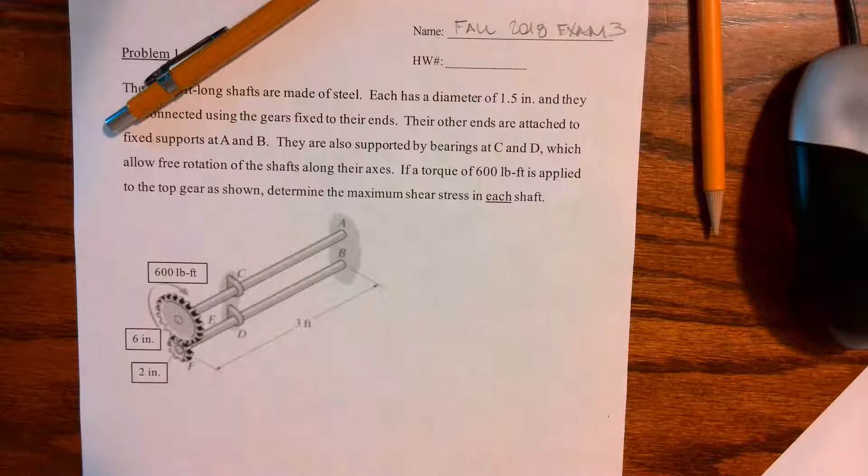Okay, this is problem number 1 on the fall 2018 exam number 3. We have two 3-foot long shafts made of steel, each with a diameter of 1.5 inches, connected using gears fixed at their ends. Their other ends are attached to fixed supports at A and B, so they have a rigid attachment and are not free to spin. They are also supported by bearings at C and D, which allow free rotation of the shafts along their axes. If a torque of 600 pound-feet is applied to the top gear, determine the maximum shear stress in each shaft.

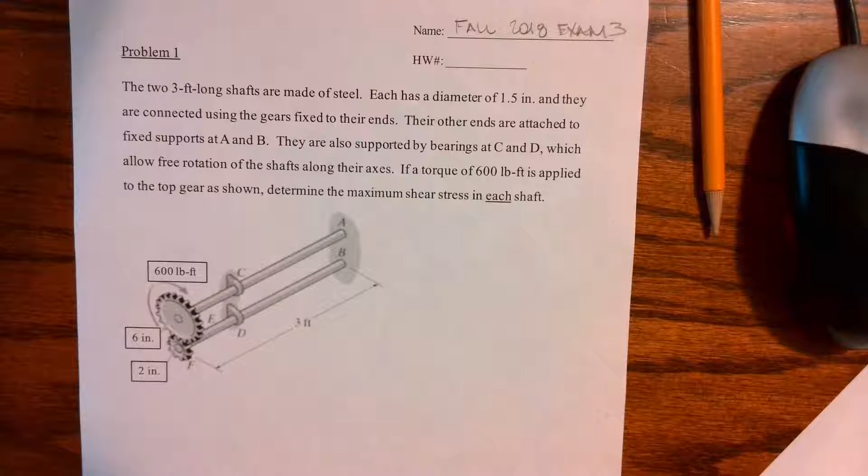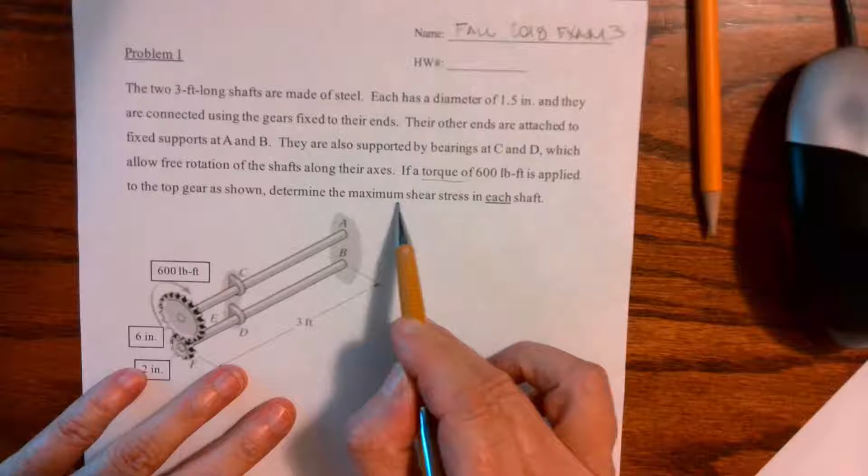So we have some keywords here that tell us whether we're looking at normal stress P over A or shear stress T rho over J. It's telling us we have a torque, and it's telling us we need to find shear stress. We have gears, and gears, we haven't seen anything with gears that's not torsion. So let's go ahead and get this set up.

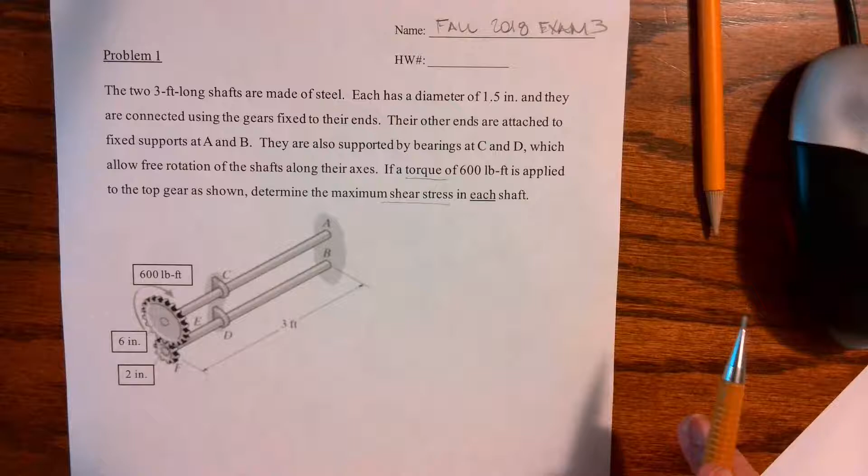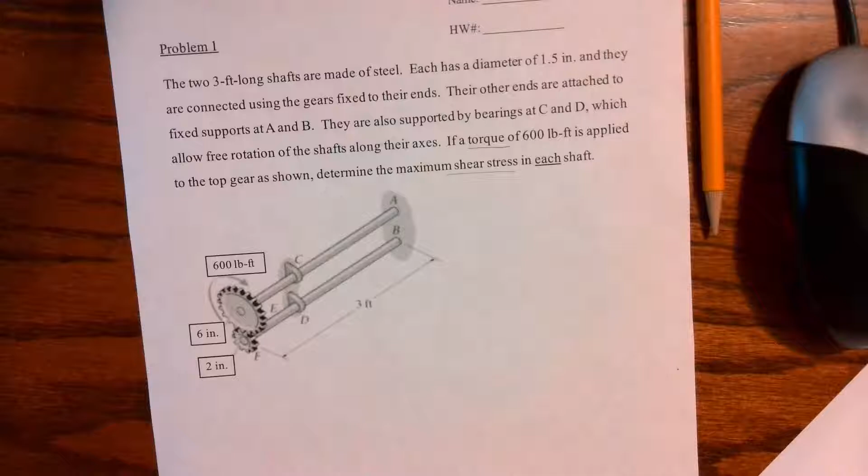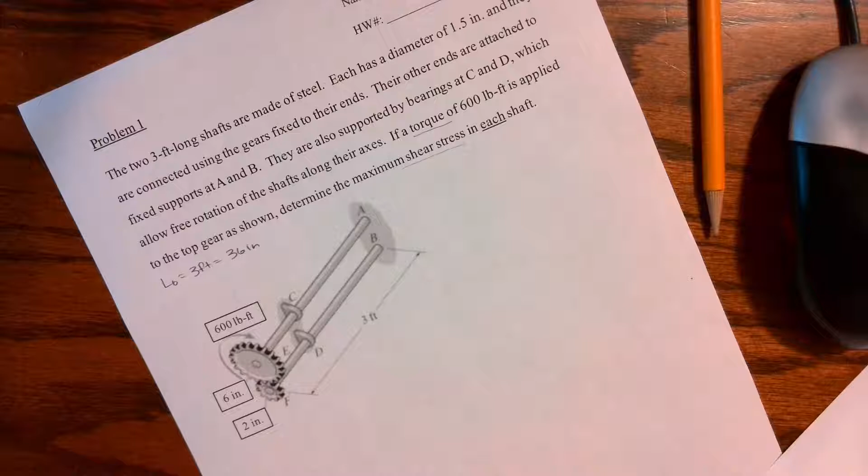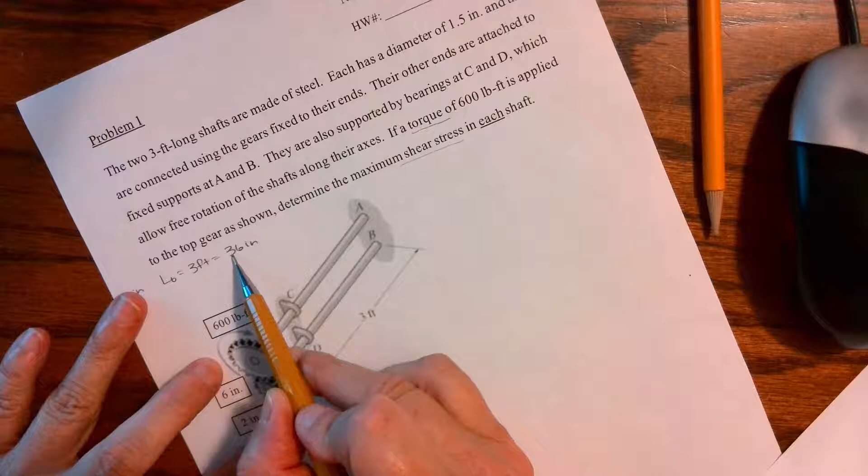It's really nice that both of these shafts are the exact same thing in terms of material and geometry, it just simplifies everything. They both have a length of 3 feet, which let's put in kips or inches or pounds and inches, so that we have consistent units. So from the get-go, I'm going to put everything in kips and inches. So I have the length is 36 inches. They each have a diameter of 1.5.

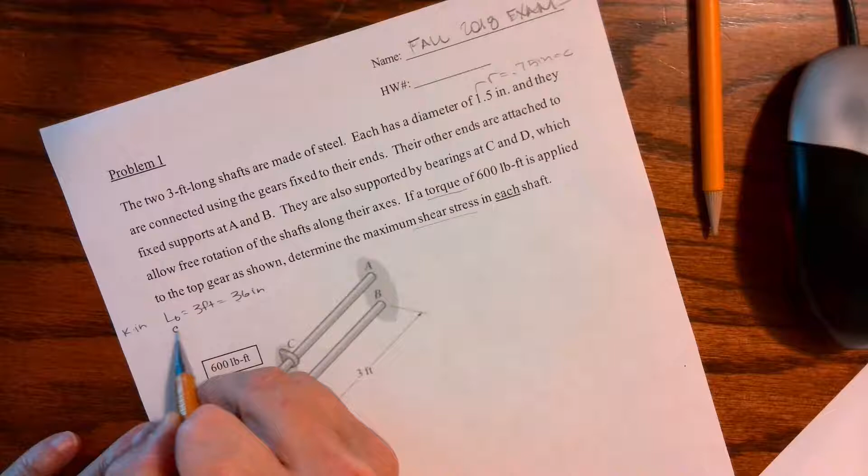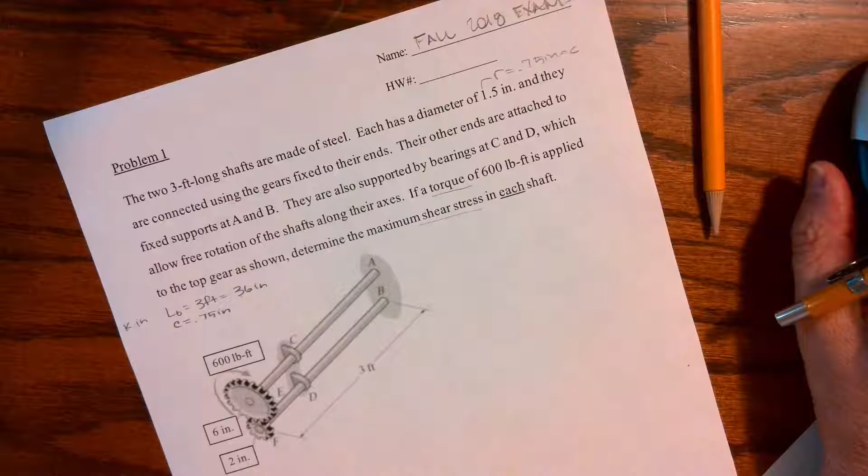That means my radius is 0.75 inches, and I know that the maximum is at C, so C is 0.75 inches, and that's for both of them. They're fixed at gears and made of steel. If I'm looking back on my first sheet for material properties, I don't really need any at this point because we're trying to find shear stress. So we'll worry about G in just a minute in case we need it.

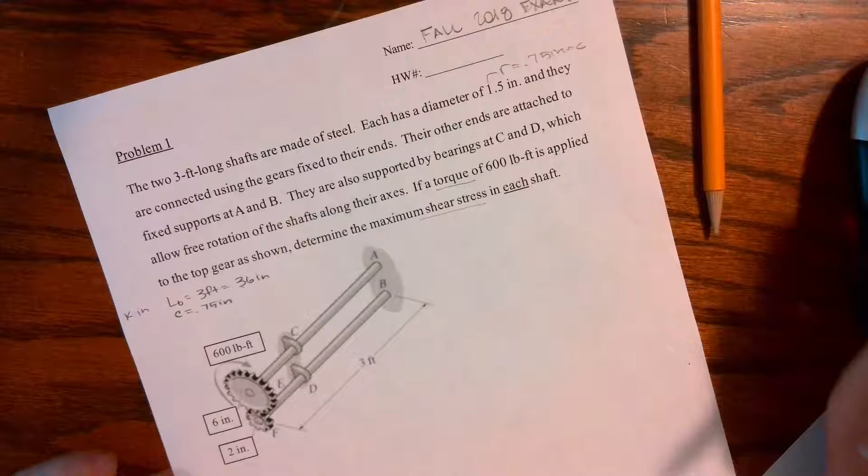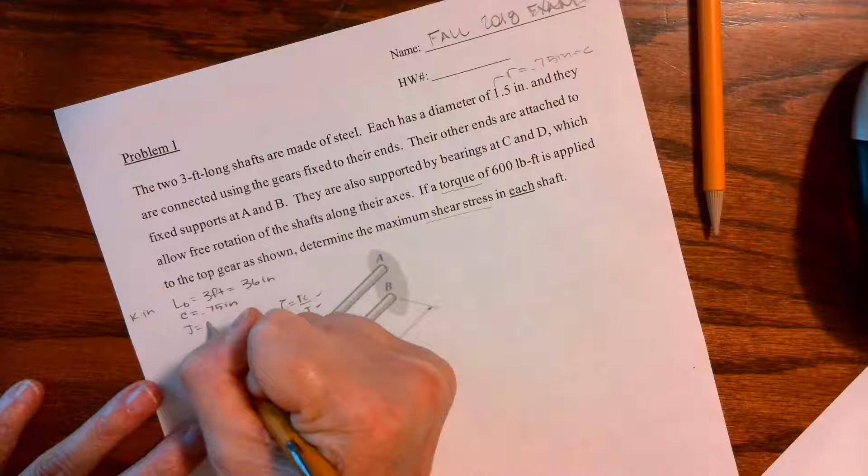Okay, so I have what I'm starting with. I know that I want to find shear stress is TC over J, and J is going to be pi over 2 times 0.75 inches to the fourth, and that's in correct units. So I have everything but that magical torque.

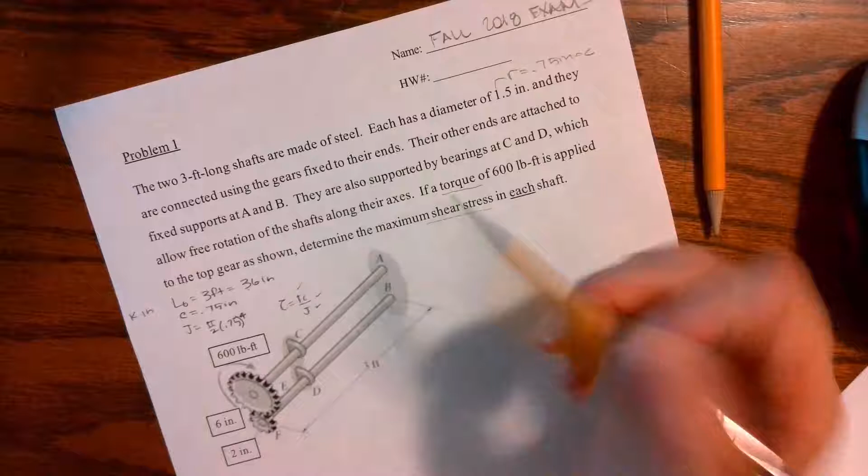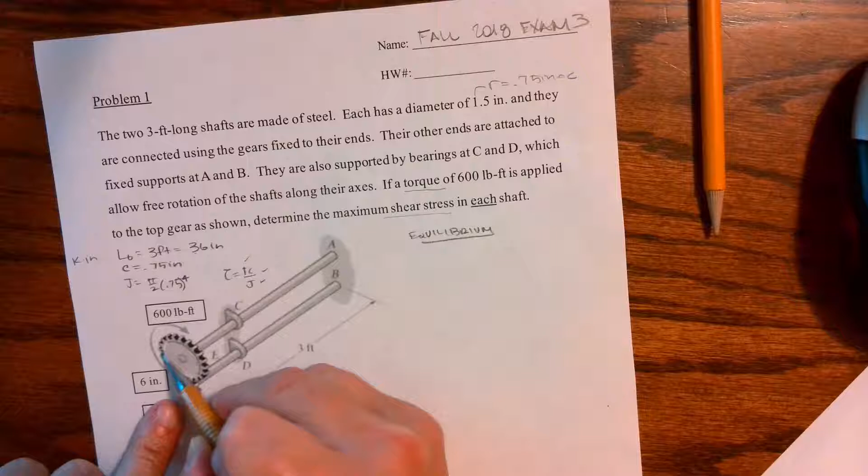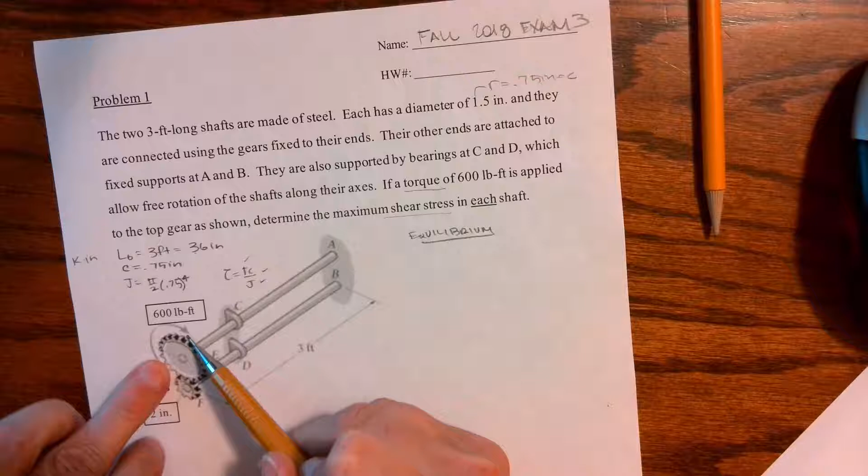So now we have to start with, like we do everything, equilibrium. And if we start with equilibrium, we are going to have to take this apart, because there's actually a resisting force acting in between these. If this is fixed at the wall over here and fixed at the wall, I have a torque, and then I have stuff going on at the wall. So it's indeterminate, but I need to go ahead with the gears and find a relationship between the top shaft and the bottom shaft.

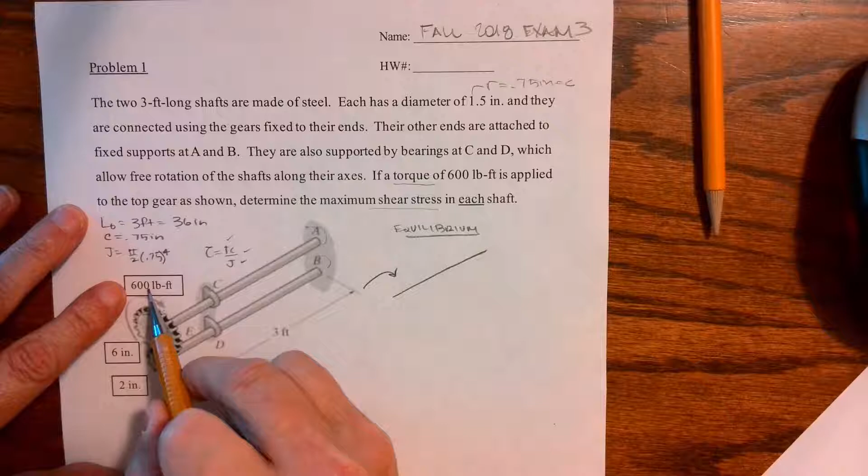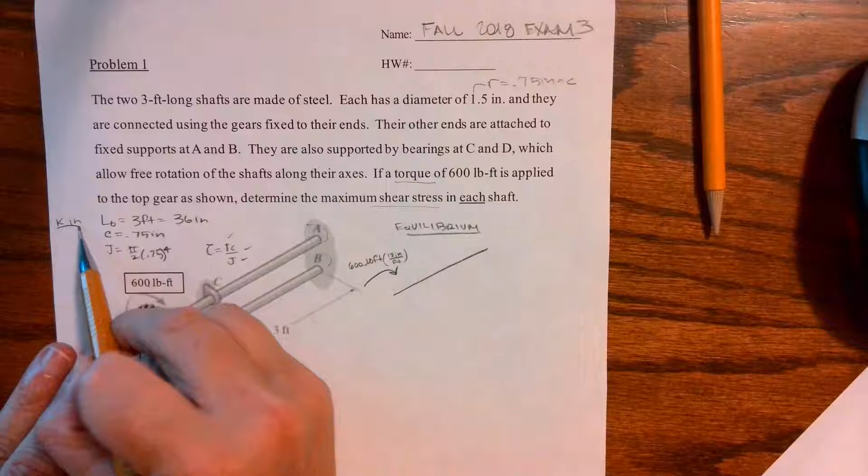So if I take the top one apart, I have this applied torque way out here of 600 pound-feet. So I have 600 pound-feet, and we're going to change that to inches per foot, because we've already decided we want it in kip inches, and we're going to divide by 1,000. So we're just putting those up there for notes for right now.

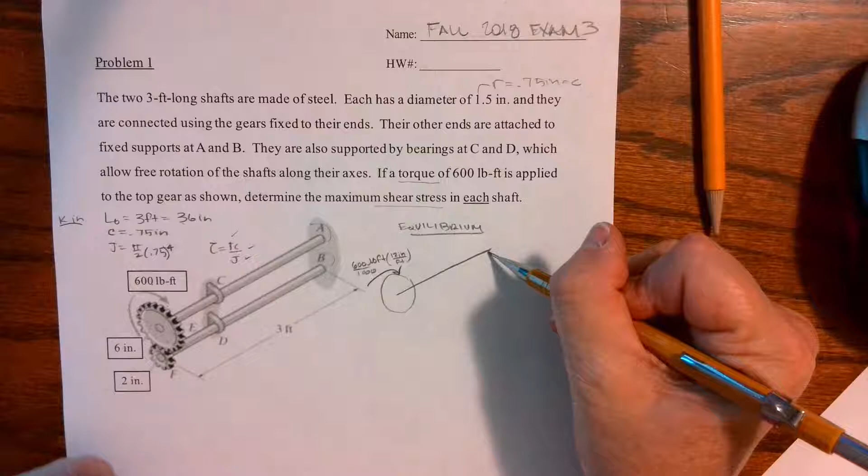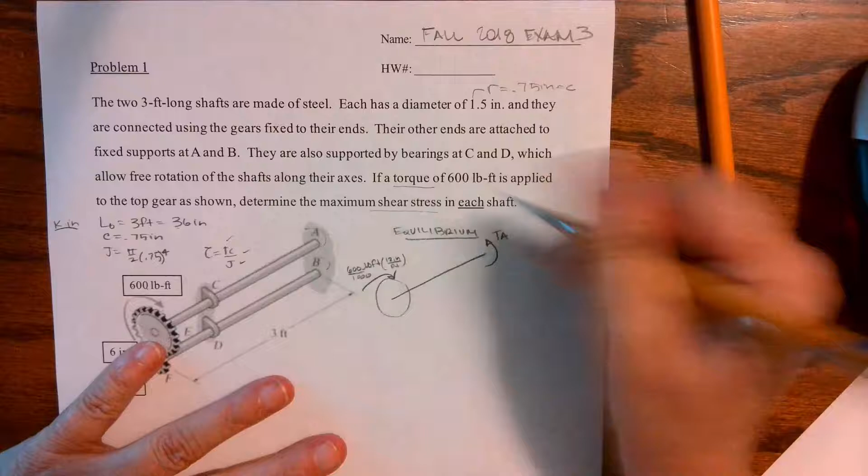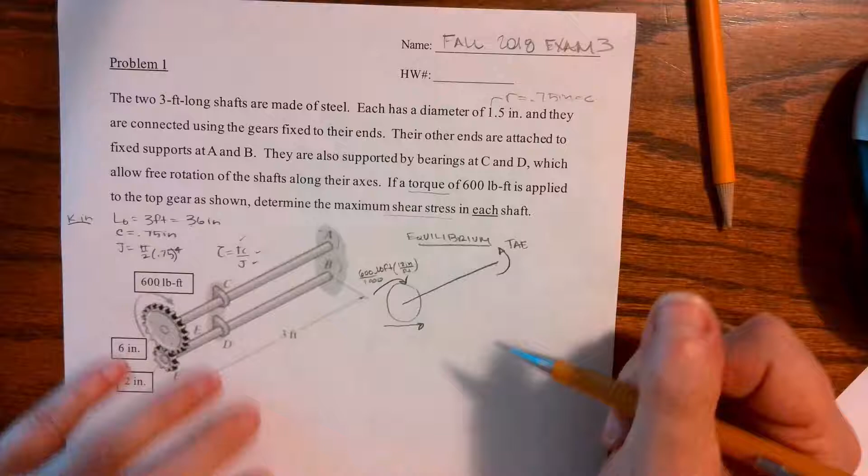I know that there's a gear acting, and something's going to be resisting at the wall. So back here at the wall, I'm going to have this torque A at the wall, but I have to recognize that's really also the internal resisting torque from A to E. And I'm going to have this force that's trying to push on the other gear. We have this radius, and it told us that our radius of the top one is 6 inches. So I have this force times 6 inches. Now this force is down here, we are also on this gear down here at the bottom, and we are pushing back equal and opposite.

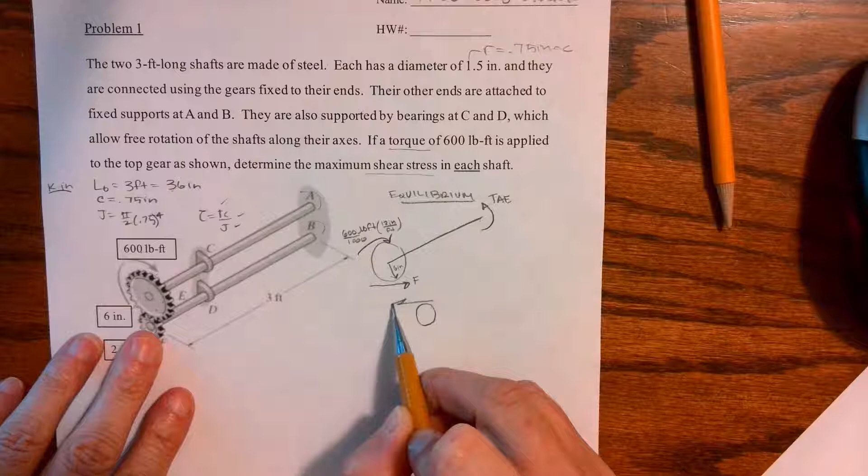Hey Alden, come get your shoe. Meg's eating your shoe.

So if this force is trying to push it backwards, then we can see that the torque at the wall has to be equal and opposite. And we have this shaft, so we have a resisting torque at the wall, B, but we can also recognize it's going to be that same resisting torque that's in that shaft because we don't have any other loads applied to that shaft.

Okay, so if we start at the top here, then I can sum my torques, and we can do this however, you can use right hand rule. Just be consistent, so I'm going to use right hand rule. If I'm coming back here, I'm going to start at the back and right hand rule positive. All of that has to equal 0. So I have torque at AE.

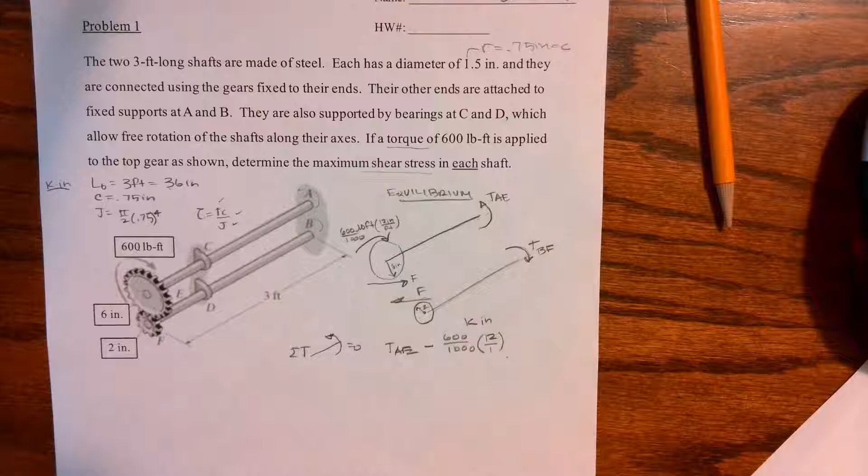And I'm going to come down the shaft, minus 600 divided by 1,000, that gets us into kips, times 12 over 1, that gets us to kip inches. And then I guess I changed it from right hand positive to going backwards. This direction is positive, positive, negative. So this force plus force times that radial distance of 6 inches equals 0.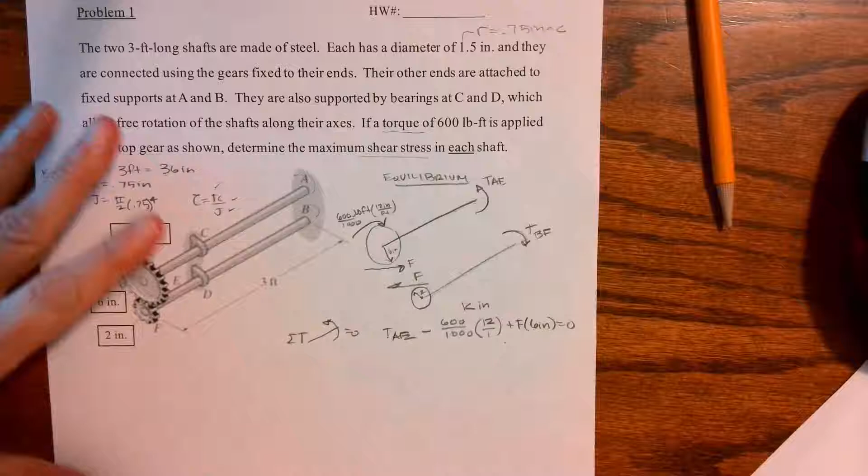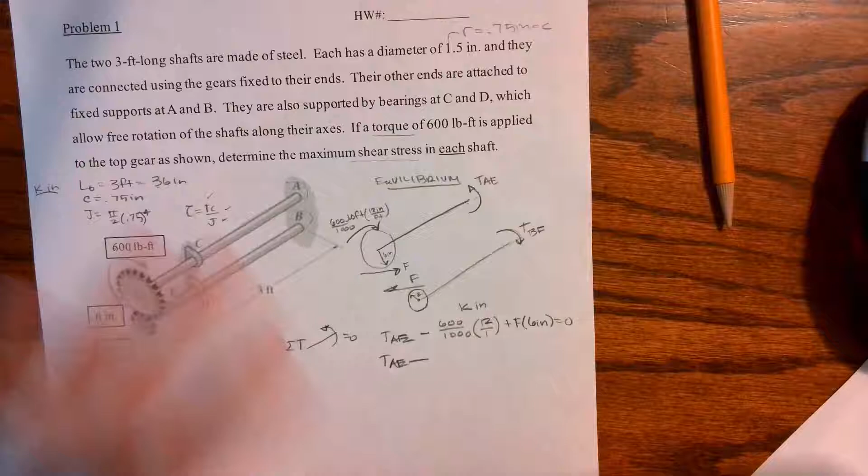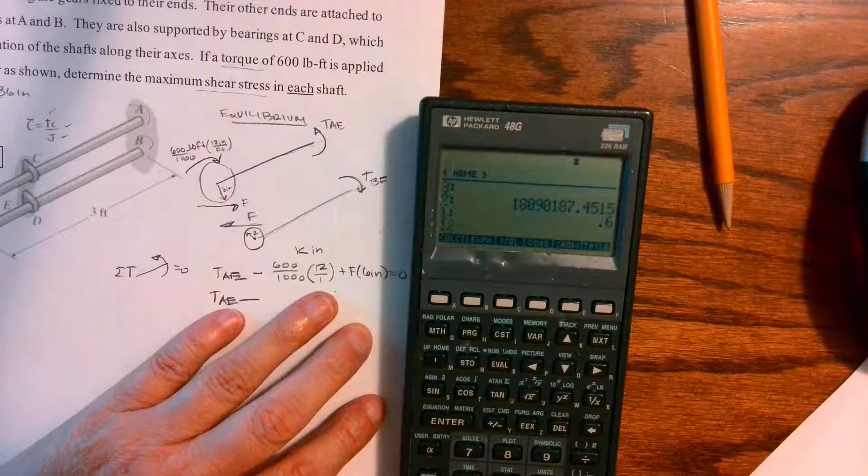And we can simplify T AE minus, let me find my calculator. Here's the problem, I have my calculator and then I lay it down and then I kind of forget where I put it. Okay, so I have 600 divided by 1,000 times 12, and I get 7.2 kip inches. So minus 7.2 kip inches plus 6F equals 0.

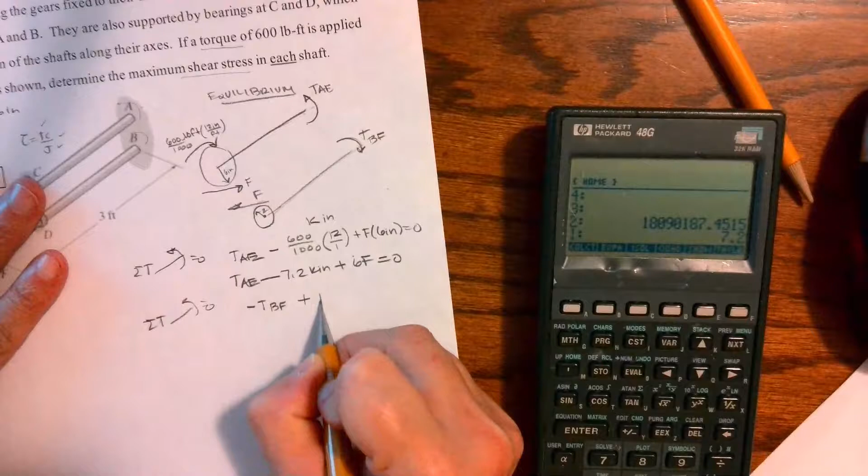And if I look at this bottom shaft, I'm also going to have some equilibrium. I'm going to do backwards right hand rule. I'm being really sloppy, but these are both positive in my head, okay, in that direction. So now I have negative TBF plus F times 2 equals 0. So we can say 2F equals TBF, F equals TBF over 2.

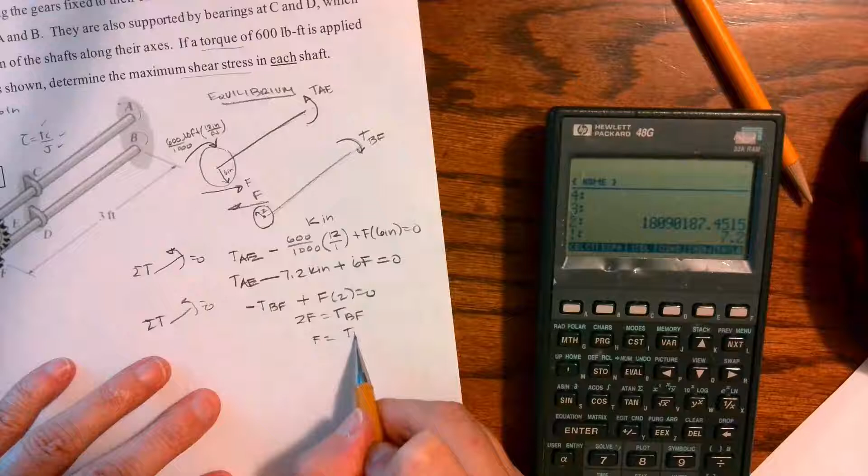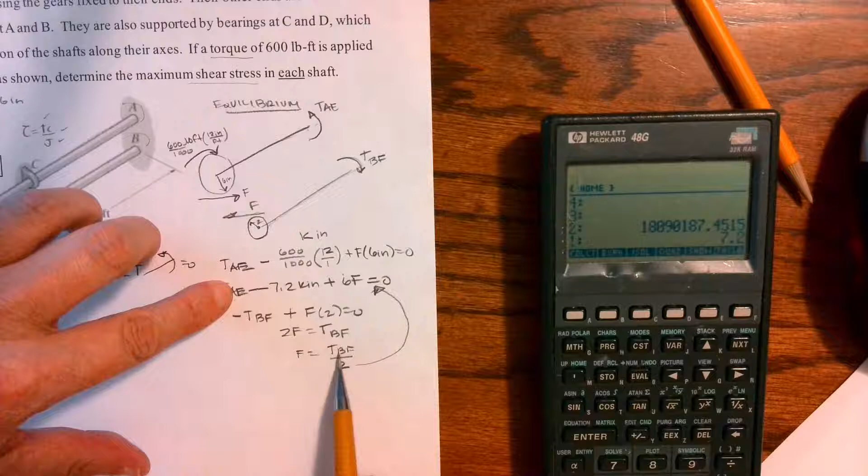And we can plug that in back up here, and that way we have one equation that relates AE, BF, my torques in both of these shafts, and what's applied. So if I plug this back in, I'm going to get TAE. Here's my equilibrium equation: TAE plus 6 over 2, that's 3 TBF, equals 7.2 kip inches. So I kind of did some math in my head, but if I take this value and plug it in, I get 6 over 2 is 3 TBF, TAE, and then moving that over equals 7.2 kip inches.

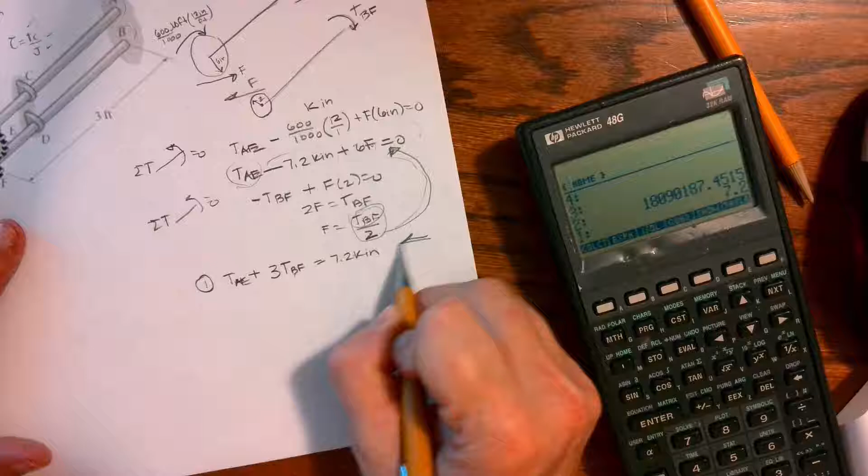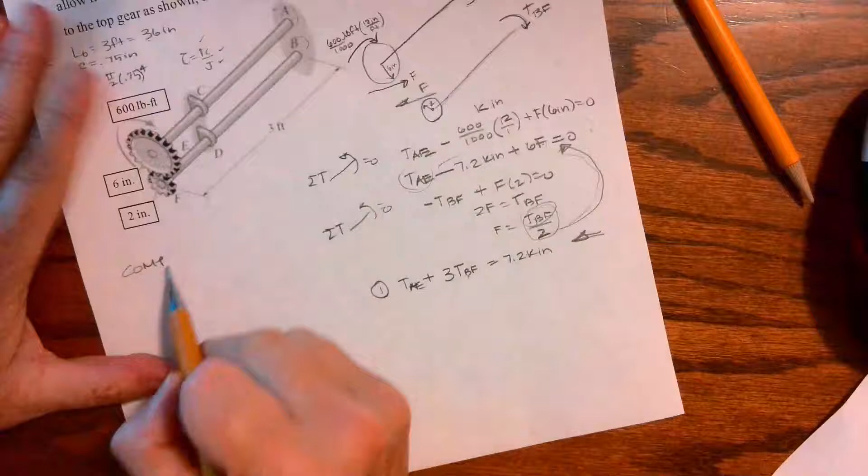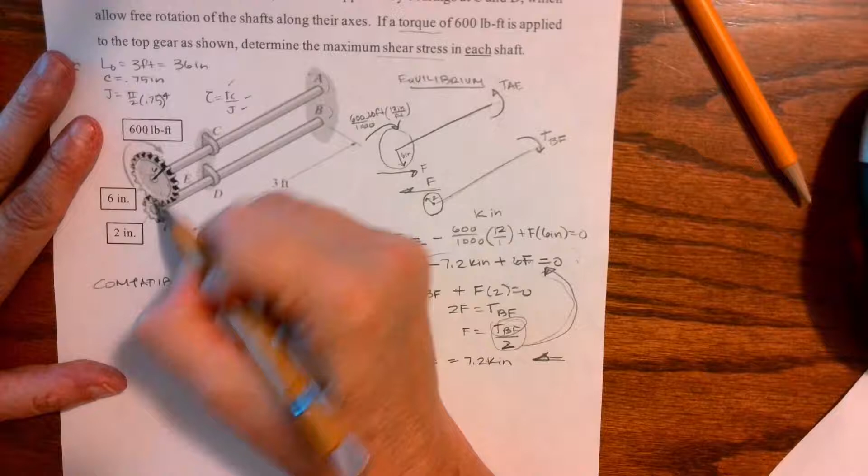So I can see that we are indeterminate, and I have my one equation from equilibrium, and now I'm going to have to go back to compatibility. And I have to remember that it's going to be a function of either radius or teeth. If this is 6 inches and this is 2 inches, then as this twists over, that angle is a function of how far it's going to twist, so it's dependent on that radius.

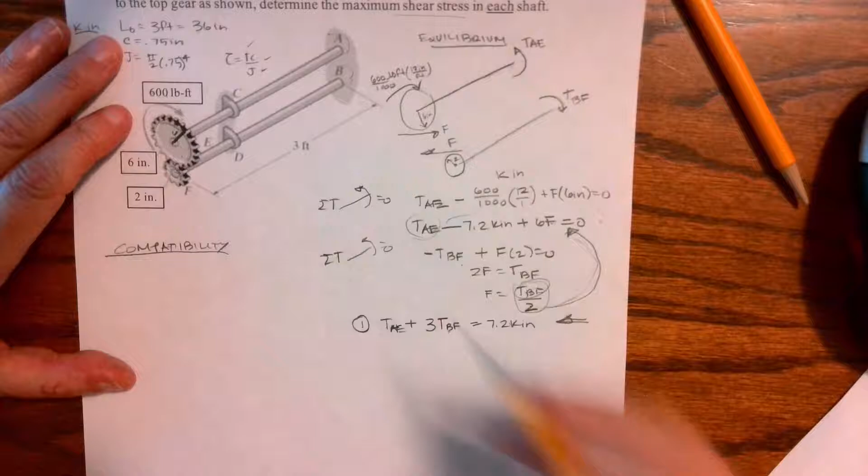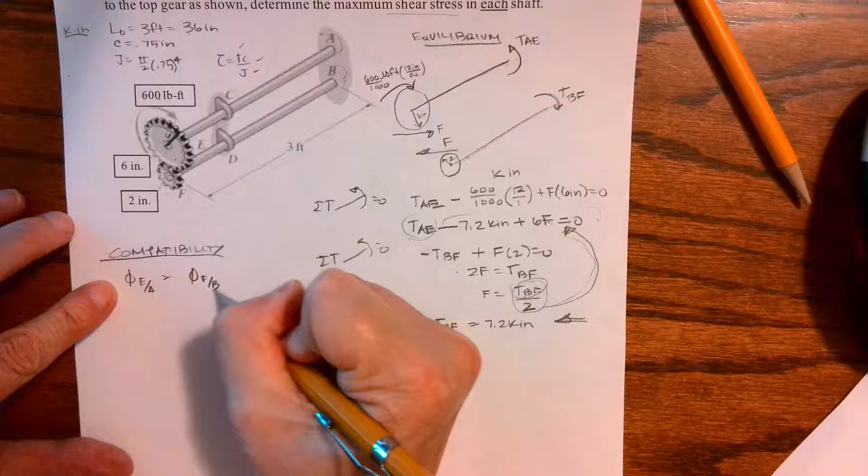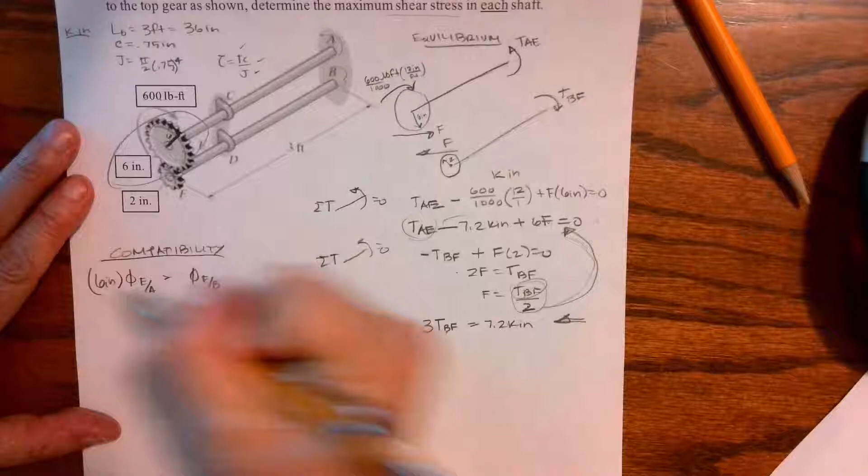So when I look at the compatibility, I know that the angle of twist from A to E has to have that same twist from B to F, or a ratio thereof, because they are both connected and rotating together. So the rotation of E with respect to A has to somehow equal the rotation of F with respect to B. And the beauty of teeth, or radius, or diameter, is that you just take that value associated with each gear - we went over in class where it came from - and we now have our ratio. So it's pretty easy peasy.

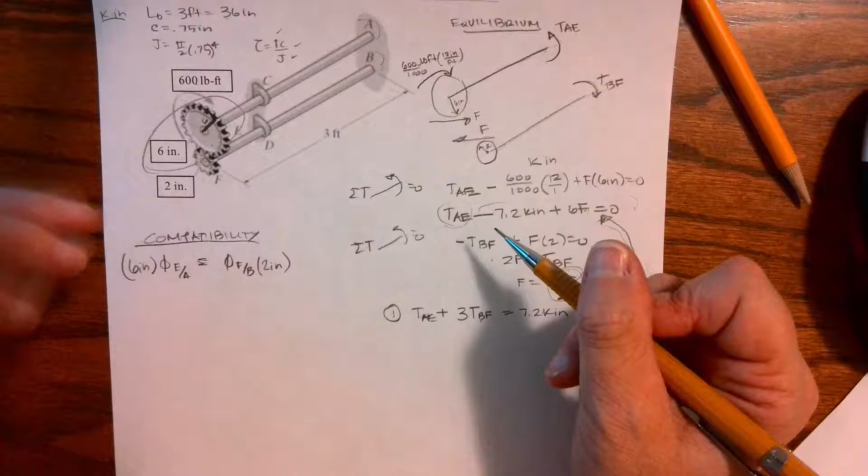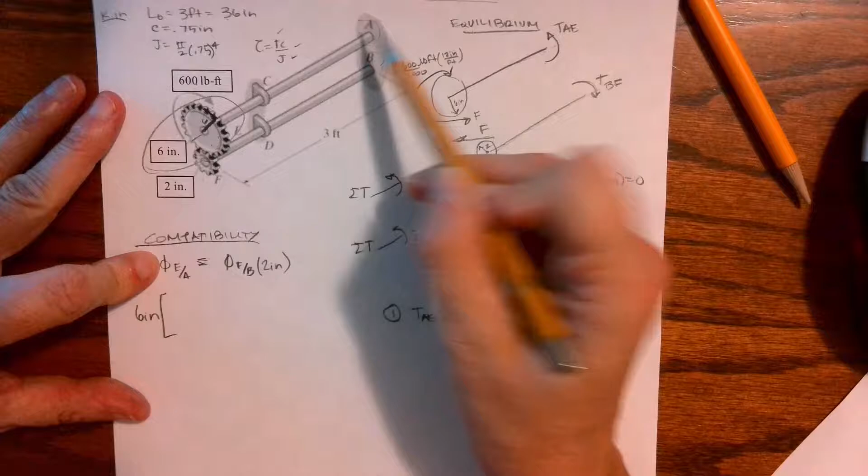So if I'm looking at this, I have 6 inches, and what is my angle of twist from E to A? I know that the angle of twist is TL over JG. So I'm going to have the torque that's from A to E, the length, the J, and the G equals... 2 inches. The torque from B to F, length, J, G.

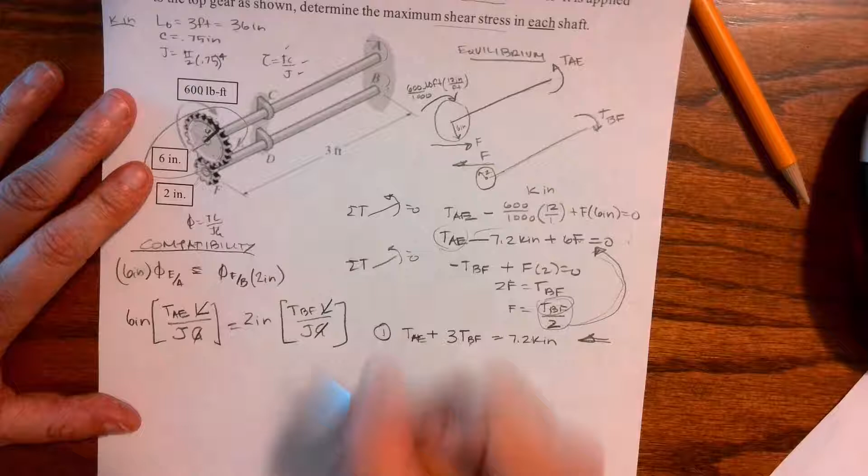And this is why I wait to put numbers in until I get started writing up my equation, because I may not even need numbers. I know they both have the same length, I know they are both the same material, and I know they both have the same diameter. So what I'm left with is 6 TAE equals 2 TBF. So TBF equals 3 TAE, and this is my second equation.

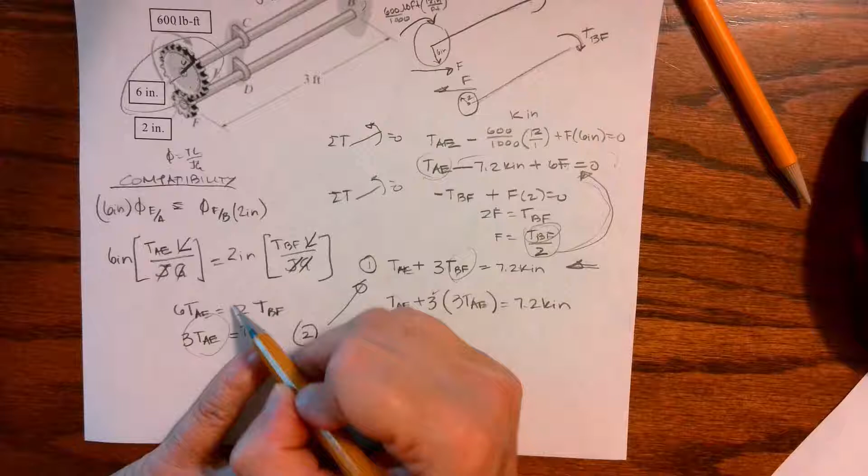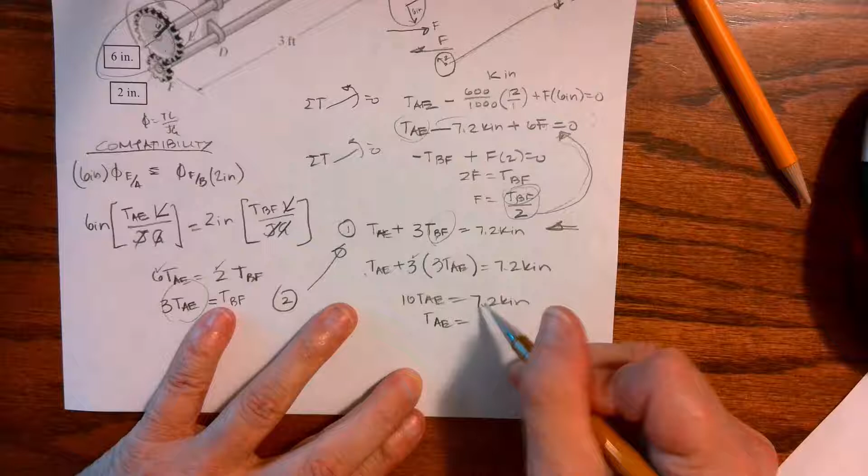It can go right back in here. So I have TAE plus 3 times - well, TBF is 3 TAE - equals 7.2 kip inches. And these radii that we had were in inches, so we're still good on units. So I get 10 TAE equals 7.2 kip inches, so the torque in A to E has to be 0.72 kip inches.

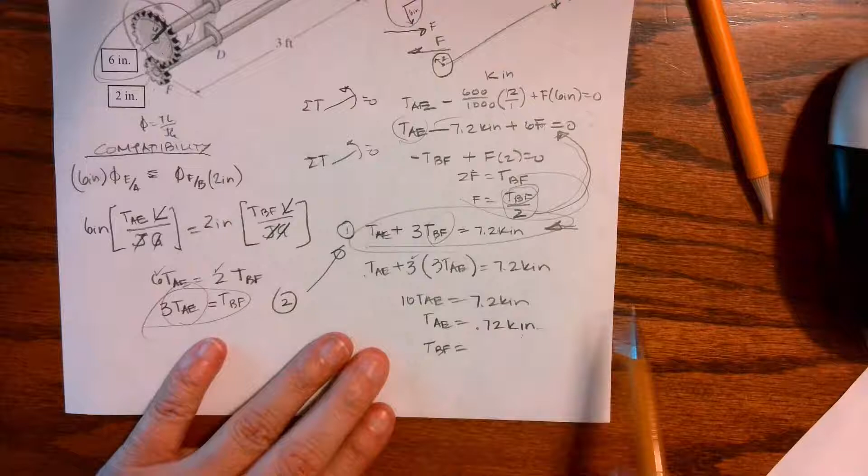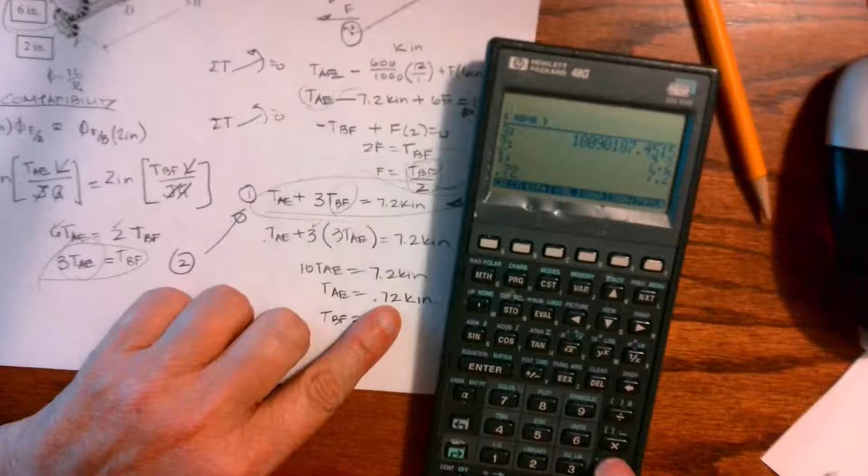And if this is 0.72 kip inches, then TBF has to be - we can go back up and use this equation, or, where did it go, this equation - so if AE is 0.72 and I need to find BF, then I can take 7.2 minus 0.72, divide it by 3, and I get 2.16 kip inches. So here's the torque in both of those members: 0.72 and 2.16.

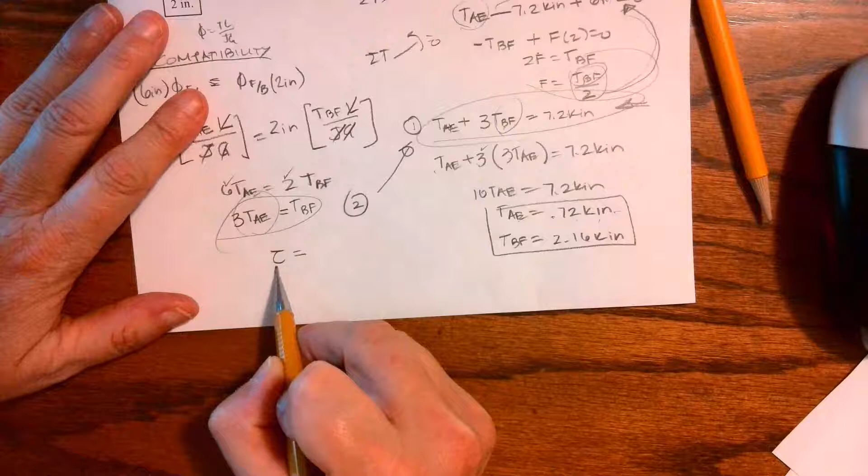So now I can get the shear stress in A to E: the torque 0.72 kip inches. Now I need rho, or C, that's my radius on the outside, pi over 2, 0.75 to the fourth, and we're still looking at kips and inches, and I'm going to get a shear stress of 1.09 KSI, and that's from A to E.

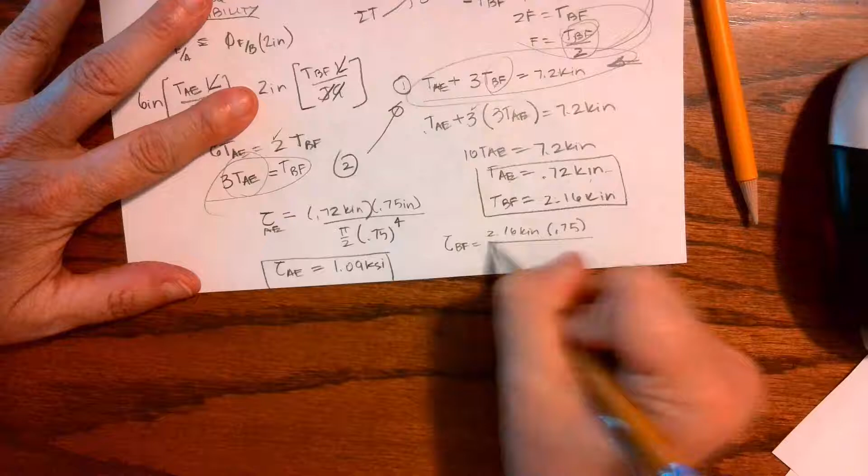I can do the same thing and go from B to F. So I'm going to have 2.16 kip inches times 0.75 - remember, they're the same - divided by pi over 2, 0.75 to the fourth. And if I multiply this out, I get 3.26 KSI, and that's the shear stress from B to F.

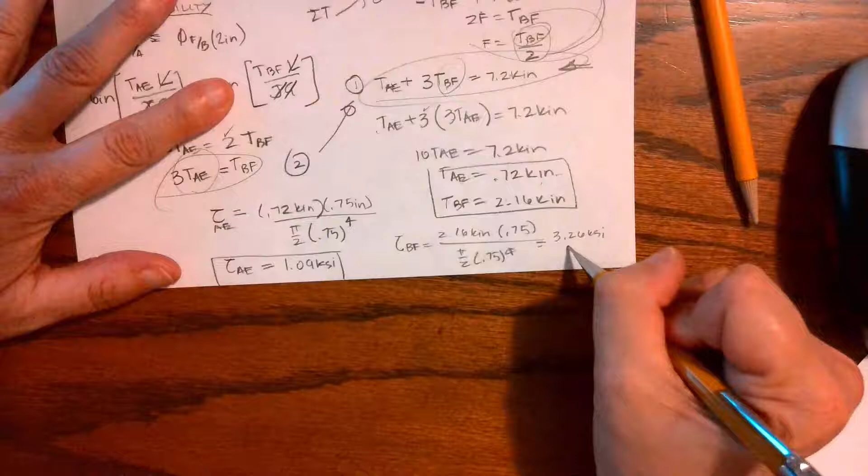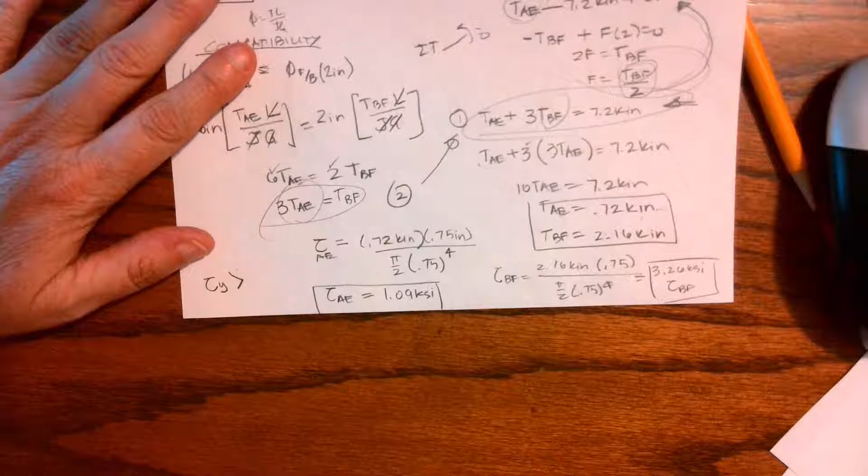And so the first thing I would have to do here is make sure that both of those are less than yield. Both of those need to be less than yield, and depending on the steel it could be 21 KSI. And both of these are clearly less than that value of yield, so it's a very valid solution.